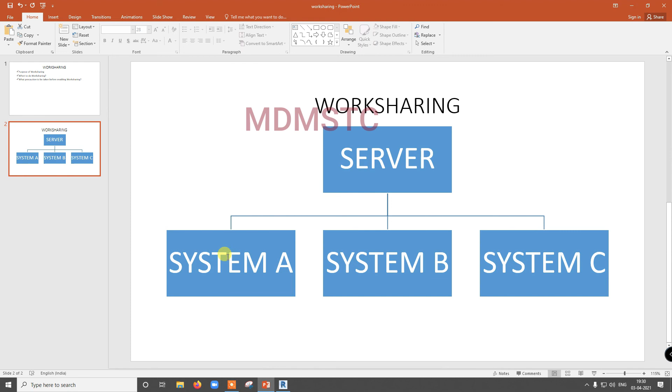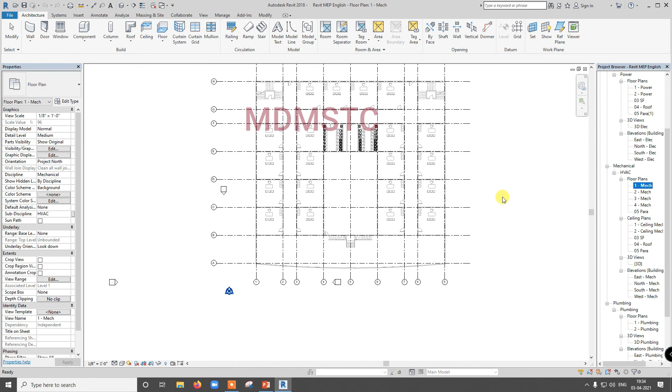When to do work sharing? If they get the order, then they will start work sharing - when the need arises. If they are going for real project orientation and taking up the entire MEP work, and a different team is going to work on that, then only they will enable work sharing. Because if it is in the quotation stage, there's no need for work sharing - if you enable work sharing unnecessarily, so many problems will come. That's why only if really needed, they will go for work sharing.

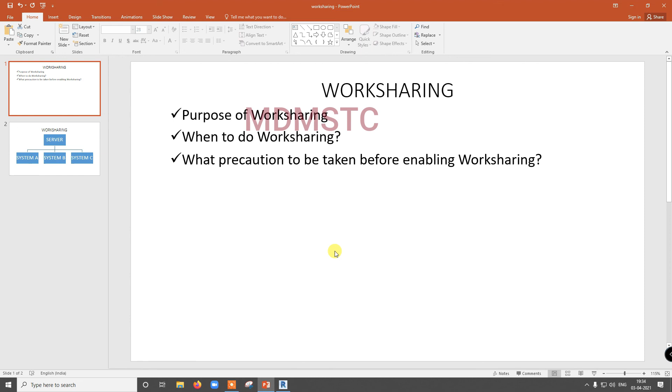What precautions should be taken before enabling work sharing? Before enabling work sharing, take a backup copy of your file. If not, you cannot get the original file back. From work sharing you can disable and change to a normal file - that's no problem, but you will not get your original file. So for that purpose, first take a backup of the original file, keep it aside, then enable work sharing.

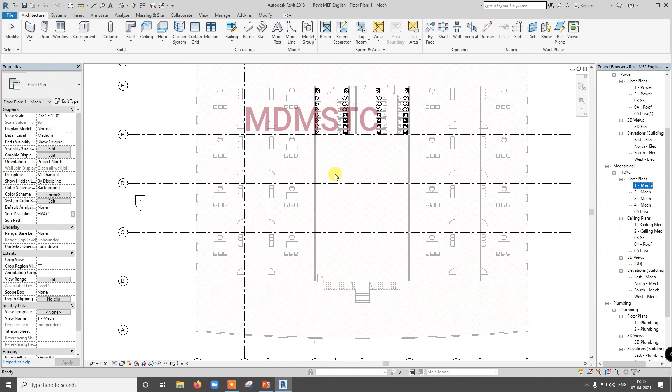Now let us start creating the central file. Since I am actually working in a single system, I am going to consider this same system as a server and the local systems as the client systems.

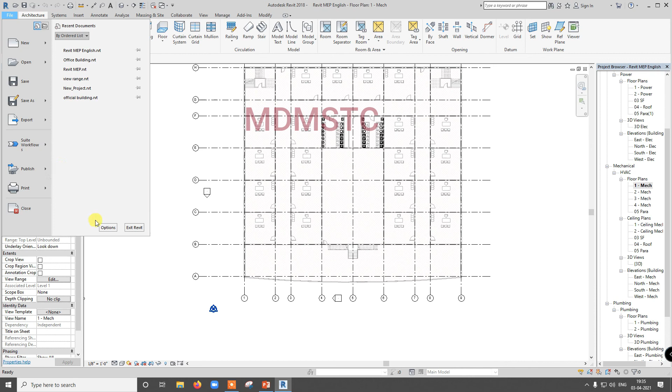For that purpose, I am going for options - let me close this and go for options, username. Have your username, change usernames, then only we can identify it as a local system. For each local system I am going to have a different username, and for the server I am going to name it 'server'.

Going to open the file - I already copied and saved it in a different location, so I am opening the file. Here I have already done the link to the file.

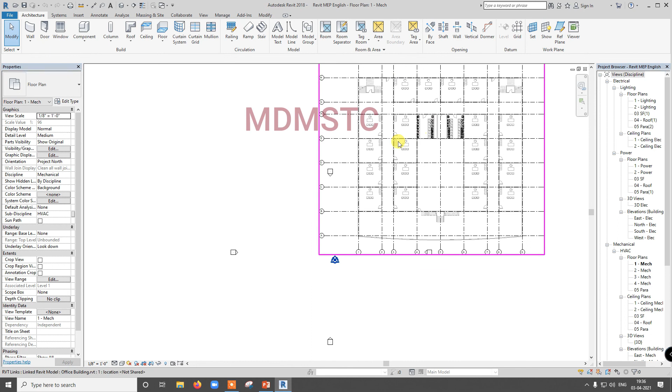Linking is done. When the linking has to be done, before work sharing or after work sharing, depends on your system. In some cases, without linking any files, they will create a work shared empty file.

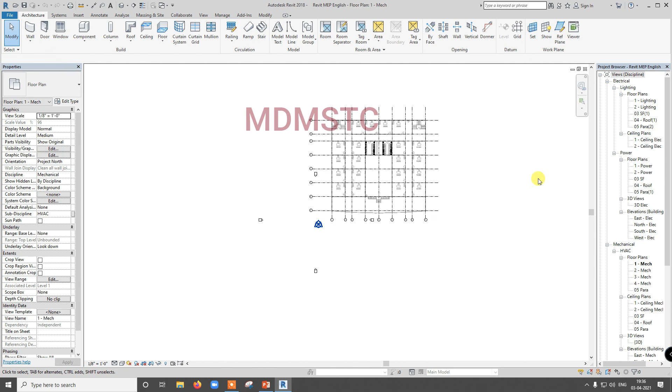Then those working on the local files need to link their respective buildings, because building A, building B, building C - there may be 5 to 10 buildings in a single layout, and one person works on one building while another works on another. For that purpose, the person working on that building needs to link the file.

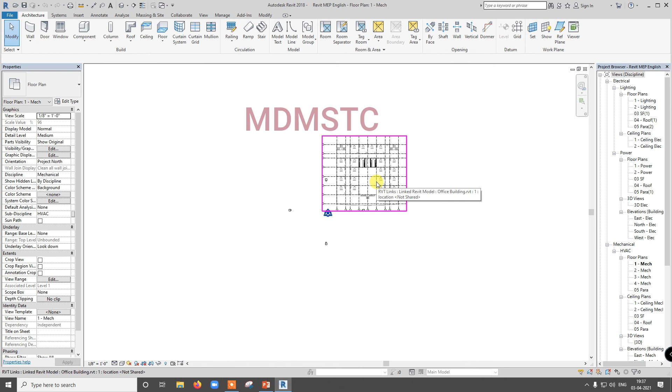So what I am going to do now is go to the Collaborate tab. In that, under Manage Collaboration, click Collaborate.

Okay, there are two options available now: collaborate within your network, or collaborate using the cloud. Collaborate within your network means your server, this system, that is you are connected, maybe through LAN or WAN, wide area network or internet, local area network, any network you are connected.

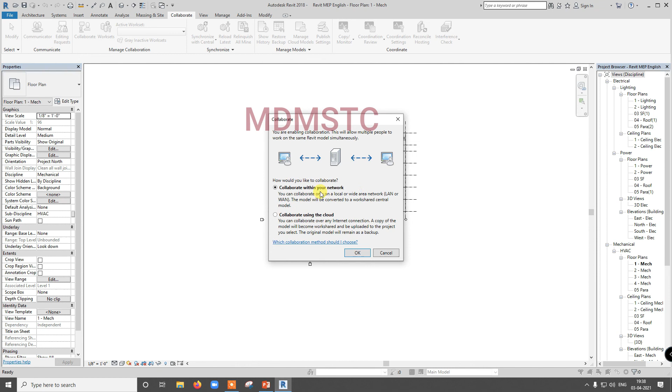With your server, that is your company system connected, that is collaborating within your network. Collaborate using the cloud - Autodesk is providing a cloud server, that is actually a paid service. If you are using that cloud service, then you can use collaborate using the cloud. Now we are just going to see about collaborate within your network only. Select collaborate within your network, click OK.

Now your central file is created, work shared central file is created. See, now you can see work sets, and instead of collaborate, now it's changed to collaborate in cloud. That is active work set. There are two work sets there. Now we have created the central file. Now let us see some components.

Work sets, click this. Now you can see active work set, that is work set 1 is active. Now whatever things you are going to work on, it will sit on this, just like layers in AutoCAD.

So work set 1, and the name is shared levels and grids. What will happen now? There are levels and grids already we have seen. If you are working on that, they will share the levels and grids in a single file, and it will sit on shared levels and grids. By default, 2 work sets will be created.

Work sets, then editable, let us see later. Owner, server - actually we have seen that in options the username is server, same name is there. Borrower, let us see later.

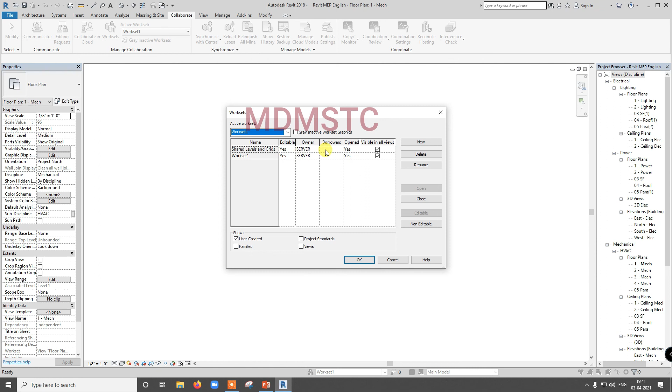Open, that means whether this file is open or not. Let us see, just I am going to change this to no. See, my linked file is not visible, that is closed. If I click open, it will get open.

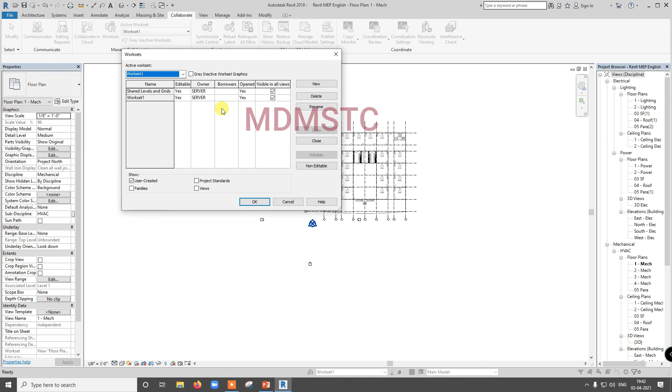Next, regarding owner, who is owning that work set? Now editable - what is meant by editable? Yes, no, there are 2 options. What is meant by yes? If you say yes, okay, there is a small difference. If it is yes, if you are owning this, if the owner is yourself, then you can see yes. If somebody is having ownership...

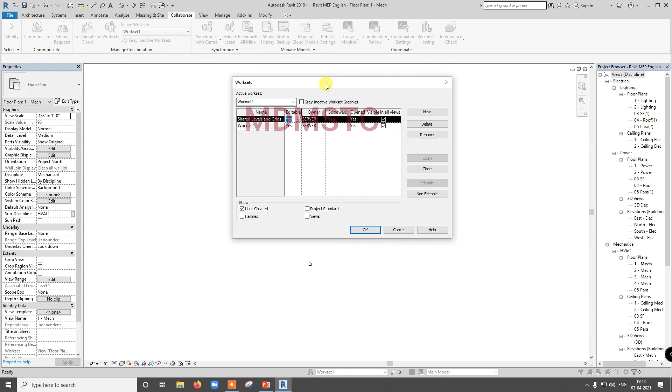This editable setting will be somewhat confusing, that's why. If some name is present as owner, then editable means that owner only can edit and other persons cannot edit. If no owner is present, then anybody can edit the file. While working on the local file we can see this, that will be the next video regarding local files. In that video you can see how the owner affects the local file. So if it says no, anybody can edit and owner's name should not be there.

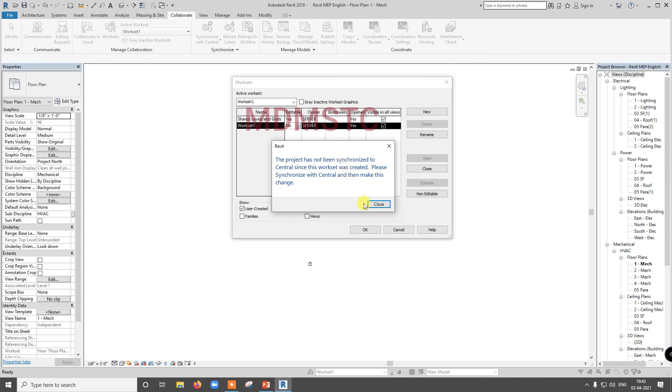In some cases it's editable no, and owner name is present, meaning that owner only can edit, like that. So the purpose of editable we will see later. By default what we need to do: the editable should be kept no, because otherwise it's giving a warning, since after enabling work sharing I didn't save, so I just have to save the file.

Now I go here, I want to change it to no. See, now it's editable no, and owner name is removed. If I say yes, owner name is present. Let it be like this only.

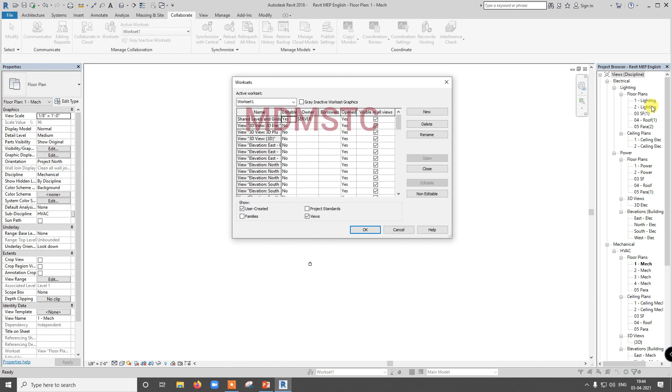Then here, show user created - these two items are user created. Then project standards, these are work sets: families work sets, views. See these views - what will happen, all these views, everything will become work sets now. So click OK.

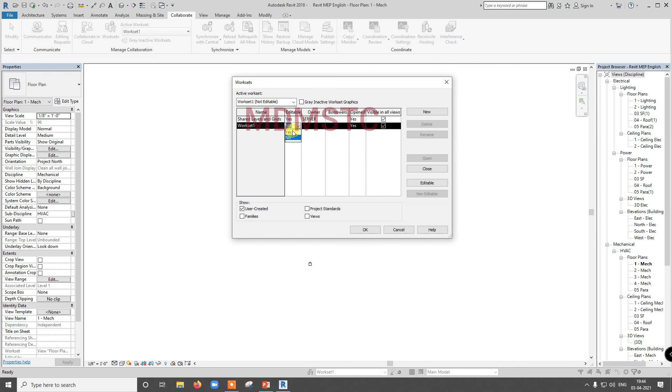So you have seen that editable should be no, and owner's name also should not be present. So for that we need to relinquish, just change this to no. I click this and click no for each and every file - if I click no for each, it will take time.

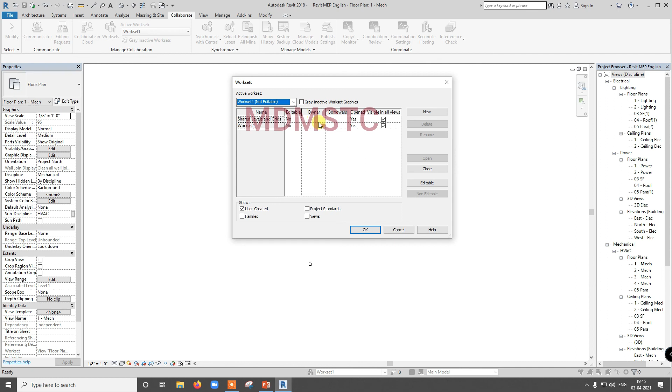For that we use relinquish all mine. In synchronize you can see relinquish all mine, that means all ownership will be released. So the condition is you should not have ownership in the central file - not only the central file, but in any local files too, you better relinquish your ownership in the work sets.

After creating central files, and you should not - after you close it, relinquish your ownership, then close it. Then you should work only in the local file, you should not open the central file. But I will explain in a later video under what circumstances we will open the central file - I will explain in future videos.

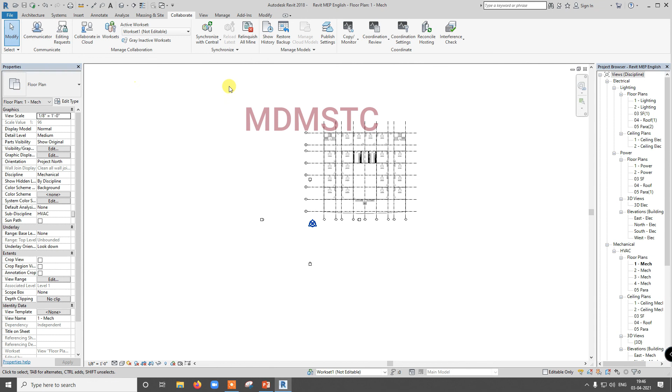So this way we will create the central file. After creating the central file, close it. In the next video we will see how to create local files.